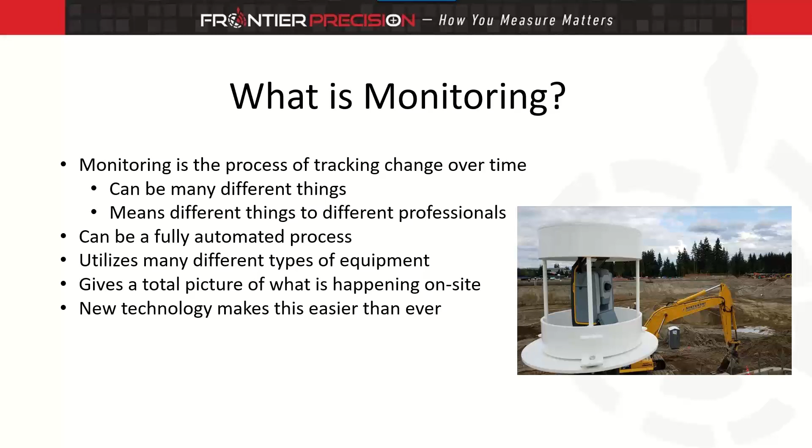These new technologies we're using today make this easier than ever, and make it very approachable for anybody else that wants to get into this line of work.

The next question then is, why do we monitor? The most important aspect of monitoring in many cases is really the safety aspect. We're always looking at ways to improve safety out in the field, and monitoring is a very easy way to make all of our lives easier and safer.

That safety aspect could be because we're taking field crews out of dangerous areas. When we're looking at mines or open pits or busy roadways, we don't always want our crews out working in these areas. So this monitoring equipment, being fully automated, can take those field crews out of these dangerous areas.

Once monitoring is set up, it allows us to detect movement early on. As things are moving out in the field, we're able to see what's happening. And if we need corrective action put into place, this data lets us know as soon as there's movement that we need to make some type of change on the site.

Maybe that means taking people off the job site entirely because there's been too much movement. But it really reduces the risk for people on the job site, and it reduces the risk of potential failures with the structures we're monitoring as well, because we know movement is occurring as soon as it happens.

Monitoring can also reduce our job costs. This is a little confusing to some people, because when we look at setting up a fully remote system, sometimes there are more costs involved in setting up these projects at the beginning.

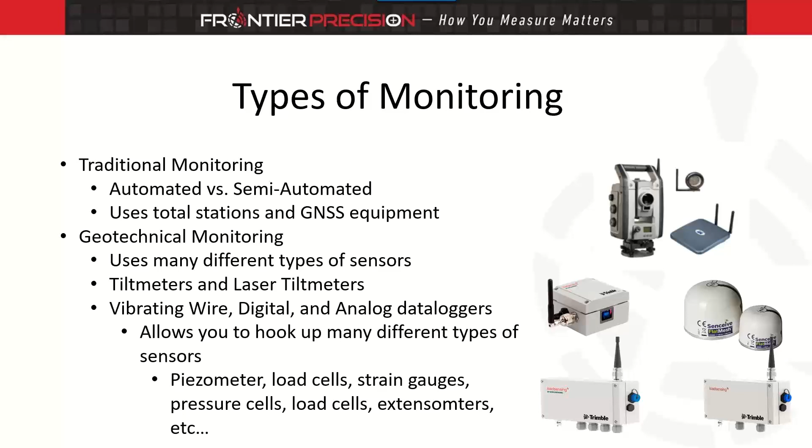A large portion of geotechnical monitoring comes down to data loggers and hooking up different types of sensors in the field. We offer data loggers in all different formats that allow you to hook up to different types of sensors, things like piezometers, load cells, strain gauges, pressure cells, extensometers. There's a very wide range of external sensors we can hook up to our geotechnical monitoring systems.

When we look at traditional monitoring, the semi-automated method is one of the easiest ways for existing surveyors to get into monitoring. This lets you use your existing equipment. You're going to need a total station, a data collector, and Trimble Business Center.

Trimble has created a monitoring app right within Trimble Access, so it's a very familiar workflow for you. That monitoring app allows you to go out in the field, remeasure the same points over and over again, and generate some rounds.

When you go out to the job site, you hit a button, tell the total station to measure all of the existing monitoring targets out there. Once those targets have been measured, we're able to create some very simple reports right in the field so we can see how much these targets have moved over time.

Once we're done in the field, we can take that data into Trimble Business Center. Trimble has also created a monitoring module right within Trimble Business Center that allows us to track our changes, process the data, and gives us more reporting options as to what we need to see and present to our end customer.

The nice part about these is they're not a permanent install. You're just using your existing equipment, driving out to the site, and measuring targets over a certain amount of time. This does require a little more time overall than automated monitoring, but it's a very low cost entry point for you.

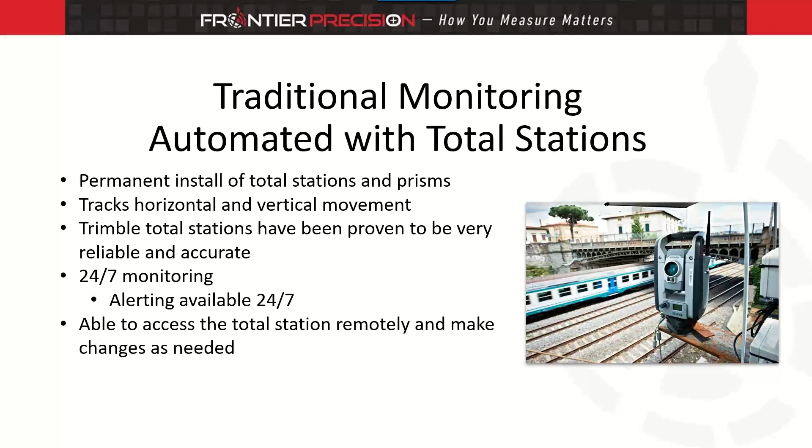The cool part about these systems is because it is a fully remote system, we are able to access that remotely and measure new targets if we needed to. We can look at the camera of the total station, view the site if we need to, and then any changes that need to be made to the system, we're able to do remotely from our office. So this is a completely remote, hands-off system once it is installed and in place.

For these projects, you are going to need a Trimble total station. This can be an existing total station you have, or we can look at purchasing a new total station. When we're looking at total stations for monitoring jobs, we can look at actually reducing cost a little bit on that upfront total station cost, because we don't always need all the features that a robotic total station is going to need for your regular survey work.

These, again, are typically installed on a dedicated pillar. It could be a poured concrete pillar. It could be a built pillar that you leave in place. And these are typically left outside. These are sealed against the elements, and so it's not going to damage the total station to be left outside. But we do also have options to put it inside of a housing if you're a little bit worried about snow or something piling up on top of these things.

Just like our GNSS systems, these can be powered either by direct 110 power or a solar power system. And then these systems do require a different data modem than what our GNSS systems do. And we have a dedicated piece of equipment called the Settop M1. This unit is actually what's going to be your field data collector and your data modem. So this is what tells the total station to measure points, and it also is what sends data from the field to our server so we can track these changes.

With that, then you do need to have either a SIM card available to put in there or have an Ethernet option available, so we can get data moving back and forth either way. You're also going to need that same software that we need for the GNSS project called T4D. Again, it's hosted on a server. That's what processes our data and prepares our reports.

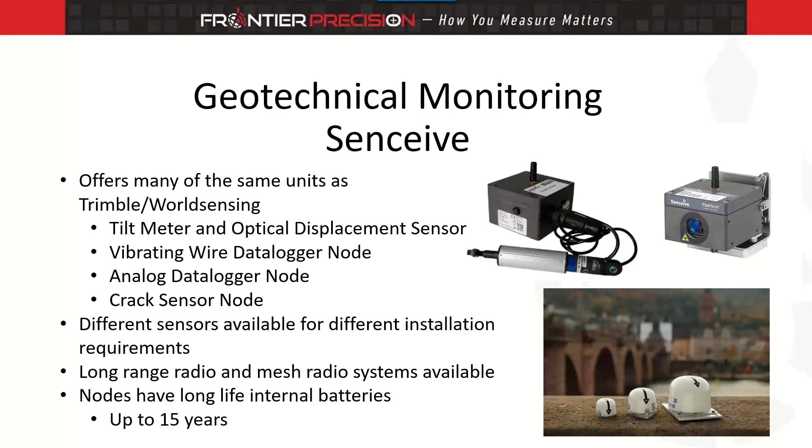We have little ones that can be put in place and you'll barely even know that they're there. Senceive does offer two different types of radios as well. So depending on the project requirements, we may be able to use a different radio that may fit that system a little bit better. And just like the Worldsensing units, these do have long life internal batteries. In this case, they can last up to 15 years left in place. So this allows us to do long-term monitoring with very little user input.

So if we're worried about, say, a wall leaning somewhere or a structure settling, this laser then is able to measure straight out from the sensor and give us that distance measurement over time. And it's very accurate distance measurements. It's repeatable down to the 0.15 millimeter range. So it's much more accurate than we'd typically be able to measure something with a total station and a man and a rod. They're very easy to configure. These are all weatherproof boxes, so we don't have to worry about these being installed outside. There are user replaceable batteries in these, and they have that long range configuration.

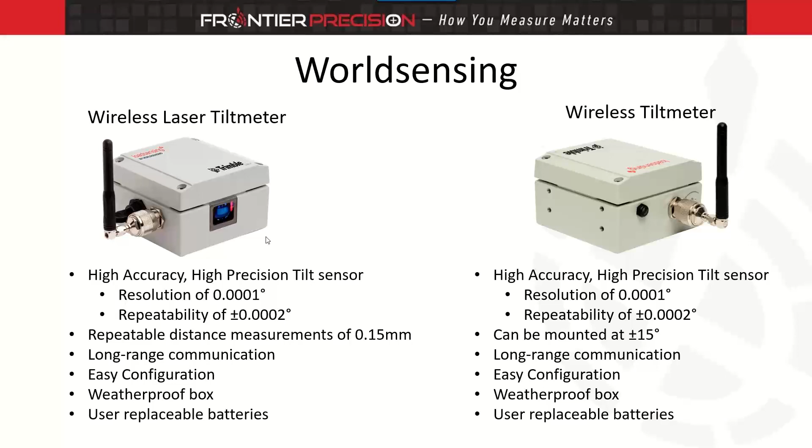And depending on how we are going to install these, we have an option to purchase these with an external antenna or an internal antenna. The external antenna is going to give us a little bit better range, but you're going to see the antenna sticking out, and there's always a possibility of that getting caught on something. So the internal antenna option does allow us to house everything inside of it, be a little bit more durable and a little less likely to be messed with.

Worldsensing is always focused on their data logger range, and they've got a very wide range of sensors able to connect to their data loggers. These data loggers are going to help us automate all of our data collection in the field. And because of the wide range of data loggers available, it allows us to hook up to almost any type of sensor that we have out in the field currently. So we have our digital system, which is kind of one of the more popular new forms of data coming into these data loggers. We also have an analog system that measures electrical input and output. And we have a vibrating wire, which is kind of one of our more traditional forms of data acquisition.

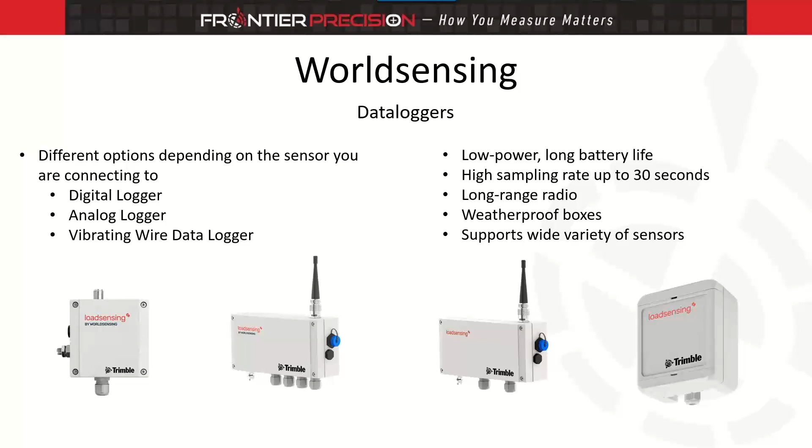These are low power units. They have a long battery life. They're all powered by that internal battery, just like the other sensors we were looking at. And these offer a very high sampling rate, letting us collect data up to every 30 seconds, giving us the option then to really accurately track long-term data on our project sites. These use the same long-range radio as those tilt meters do. It's all inside of this weatherproof box, and again, it does support a very wide variety of sensors out on the market.

From Senceive, again, we mentioned that they actually have two different types of radios that you can use depending on what your project is looking like. And so the first type of radio that's available from Senceive is called the FlatMesh radio system. This is what we call a mesh network. And so all of the nodes that are collecting data all communicate to each other, and then they all communicate to a data logger. This allows us to do what we call intelligent monitoring.

So if movement is detected, that can trigger the other sensors out on site to measure more frequently and give us more data input depending on what type of movement we're seeing and what type of change we're seeing. This FlatMesh system is typically used when there's a lot more sensors being deployed in a very tight area. Most people report data about every 10 minutes with these systems. You can increase that a little bit if you need to. So again, it gives us a lot of data over the time period that we're monitoring.

And these are fully remotely configurable. So once they're put in place, you can check these things from your office and make any changes needed from your office. Because this is a mesh network, the range between these nodes is not quite as long as some of our long-range systems, but it does still give us about 300 meters of range between each node. And then each of these nodes then act as a repeater. So, it might only be 300 meters between nodes that's available, but from the gateway that collects all our data, you can really look at extending that range out further and further just by installing more nodes out on site and collecting more data.

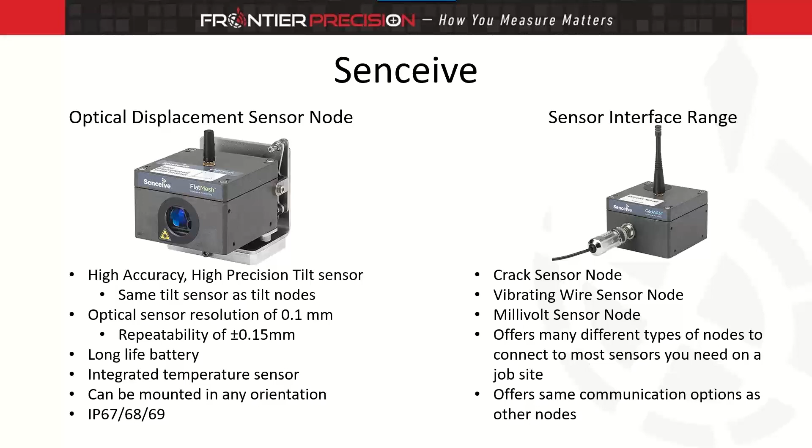Senceive also has a very cool option here called the FlexiMeasure, and this is their version of an in-place inclinometer, and it comes in various sizes. You can see that there's 4 different sizes available up here of the FlexiMeasure, and it's essentially the tilt sensors mounted inside of these flexible tubes that we can then install on a structure to track all kinds of different change. They're very lightweight. They're made of carbon fiber, so they're very easy to install.

You can install them in any orientation depending on what type of data change you want to track. It's a very low power consumption, so we don't have to worry about having external power to get these things going. And they're very flexible, so when we mount these in place, you can mount them like in this picture. It's mounted around a tunnel, and this gives us a total idea of tunnel deformation. And they're waterproof up to 200 meters, so these can actually be installed in boreholes as well, like if you were tracking changes from in-place inclinometers that way.

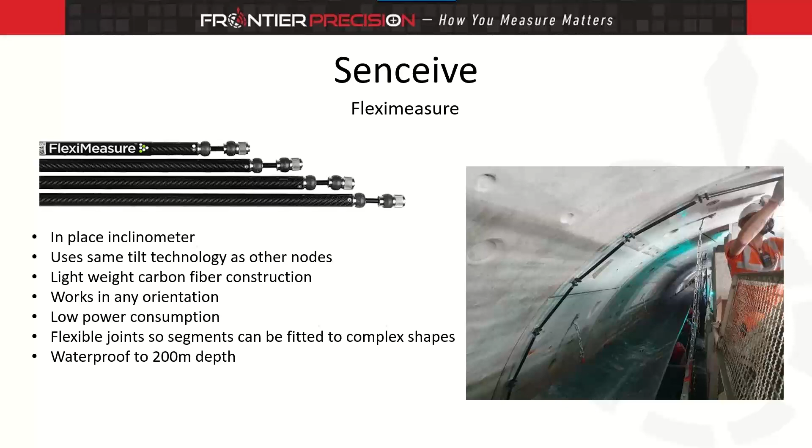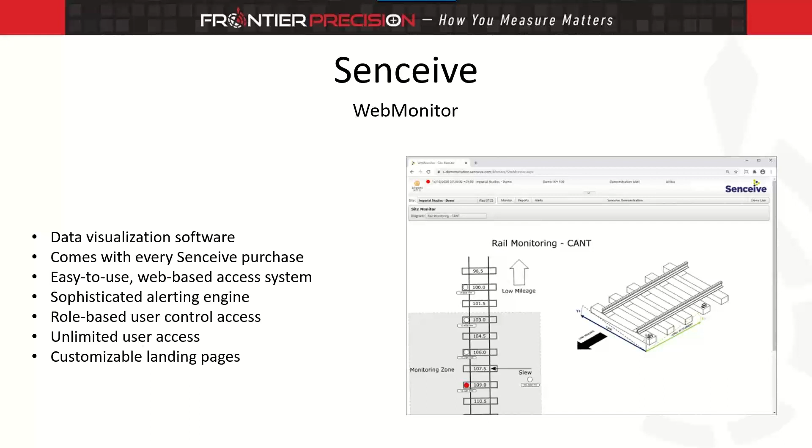Senceive does offer their own software to track these changes. Their software is called WebMonitor, and it works very similar to how Trimble software works, where it tracks all of our data, it tracks changes, and it allows us to alert ourselves if there is any changes with our data. It gives you very easy to use graphs and charts to read. It's very easy for you to set up different alerts and different tolerances for each sensor if you need to, and you can have as many users use this as you want.

That data from Senceive can all be sent to Trimble software as well, called T4D. And T4D is a software that really brings everything together. So every single sensor that we have looked at and talked about today can all be integrated into one software called T4D. This is what really makes our monitoring data powerful, because it allows us to automate our data collection, automate our processing, and then put it all in one place for us to view. It really lets you see all of your job in one place.

From that data, then we're able to create multiple reports within T4D. Those reports can be automatically sent to certain users or certain project owners, and we can customize what is included in those reports. Very similar to our alerts, we can customize those alerts that are being sent out to users as well. They can be sent to different users based on different tolerances. So you may have somebody on your job site that needs to know as soon as any movement is detected. You may have somebody off the job site that only needs to know when movement has hit a critical level. And so we can set that all up within our system. Those alerts then can be sent out over email or text messages.

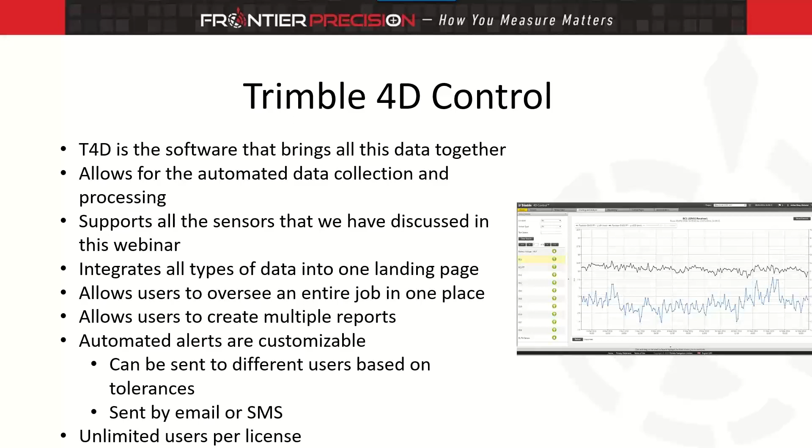And the nice part about the software too is there's unlimited users per license. So you can add as many people to this T4D license as you want, and they can all have their own level of access. So everybody can log in. Everybody might not be able to create new reports, but this is all configurable by the end user. You're able to decide what level of access you want all of these users to have.

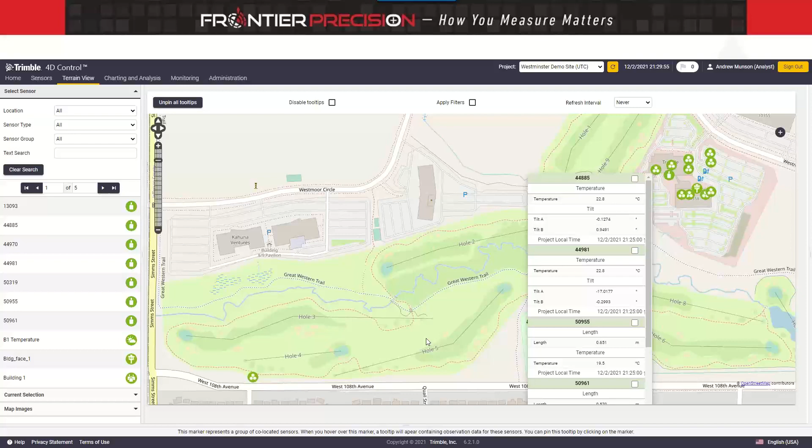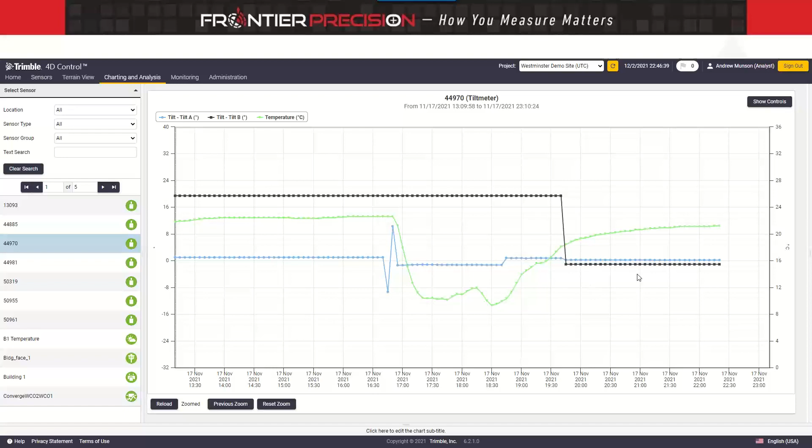From those sensors, then we're able to create charts that track our data and show us change over time. All of our axes are configurable, so you can choose how long of a period you want to look at. You can choose how close you want to be zoomed into this data to really track minute changes. And you can create charts that track all of your sensors as well.

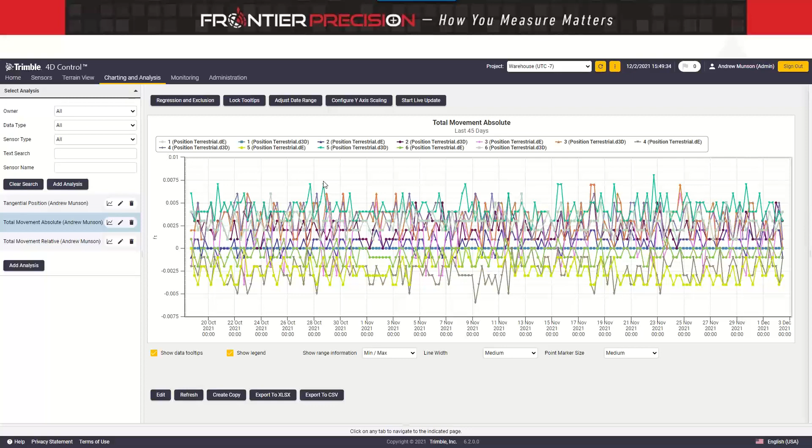So this chart right here is tracking about 6 sensors overall and displaying different types of data all in one chart. Each of these types of data can then be turned on or off in the chart, so you can really look at individual pieces if you would like to.

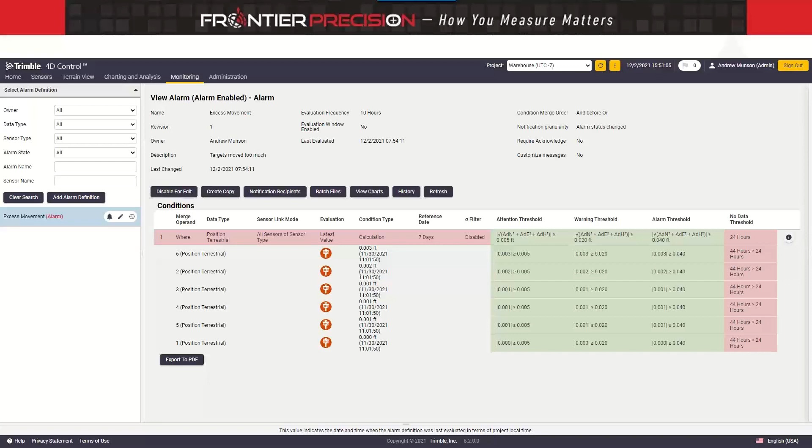So that's the other nice part about these systems: even though it's fully remote, we have an idea of what's happening, whether it's movement that's been detected or a lack of data that's being collected. This system is going to let us know everything that happens. When there is an alert that's sent out, this is a picture of the email that you will get letting you know that something is happening on your job site.

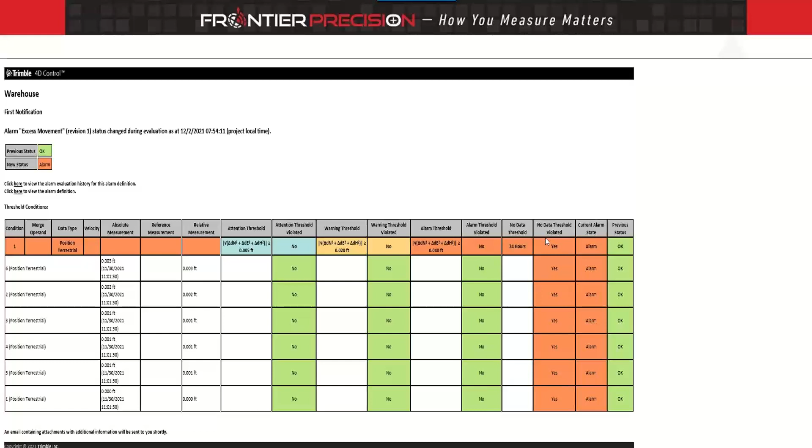And so again, if we look at this, it's telling us that we have not gotten data here for over 24 hours. And so that's why we're getting these alerts sent to our email here. With each email, then you also get another one that allows you to click on each alarm and alert that's come up and look at a little bit more detailed chart of what has happened as well. So all of this data is being sent directly to you as the end user and allowing you to track what is happening, even though you aren't on that job site.

A lot of the power here with monitoring now is that we're able to connect all these third-party sensors, and it's something that we've never been able to do up until very recently. And so with that, there are a lot of different types of sensors that we're able to connect up, and this is just a little snippet of what we're able to use out in the field.

You can use extensometers that track crack changes. There's settlement cells, crack meters, and piezometers that track all of our water levels and pressures and temperatures. So there's a very wide range of what is able to be connected out on site.

And the nice part about all of the data loggers that we offer from either brand is that it doesn't really matter where they come from. They all speak a very basic language when it comes to sending that information out. And so we can connect things like a load cell from whatever company we want to our data logger. Our data logger is just going to read that basic information coming out of it and then send that data to T4D so we can actually look at what's happening out on site.

Because there's so many of these available, we don't specifically support any one brand of third-party sensors, but we are in contact with a lot of companies that do sell these types of sensors. And so we can help you find these sensors if you need to, or we can help you integrate the existing sensors that you already have into T4D.

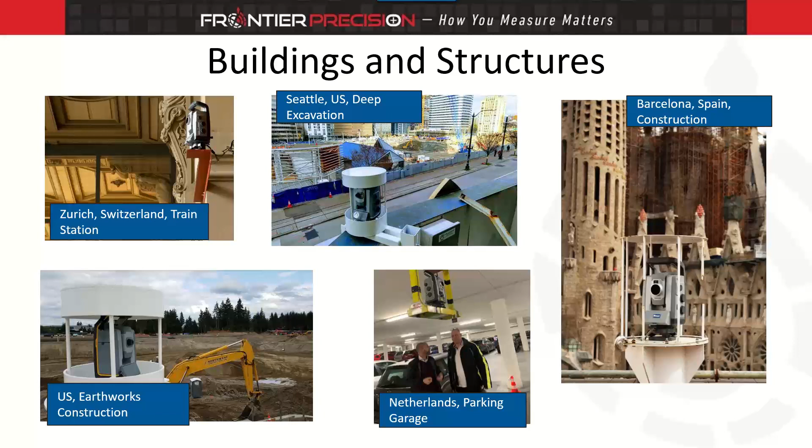It can be installed in all different situations. We've got some installed indoors, so we don't have to worry about covering it too much. They can also be installed outdoors where we've got custom mounts built in some of these photos, and we're able to help provide some of these mounting options. There's a whole range of accessories that we can provide with our total stations to help you install this equipment out in the field.

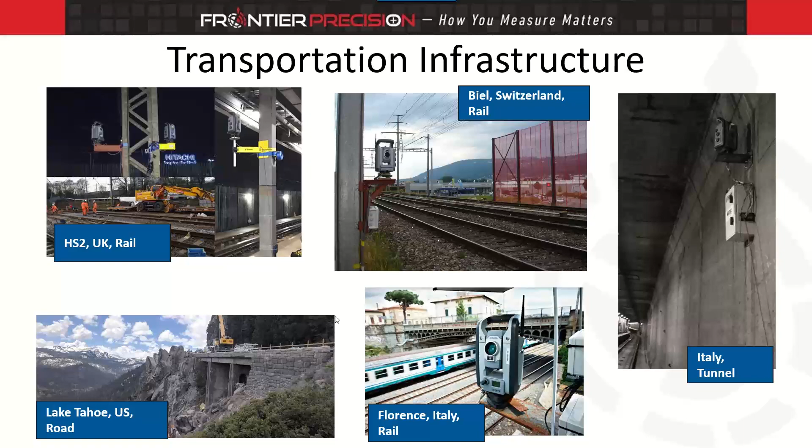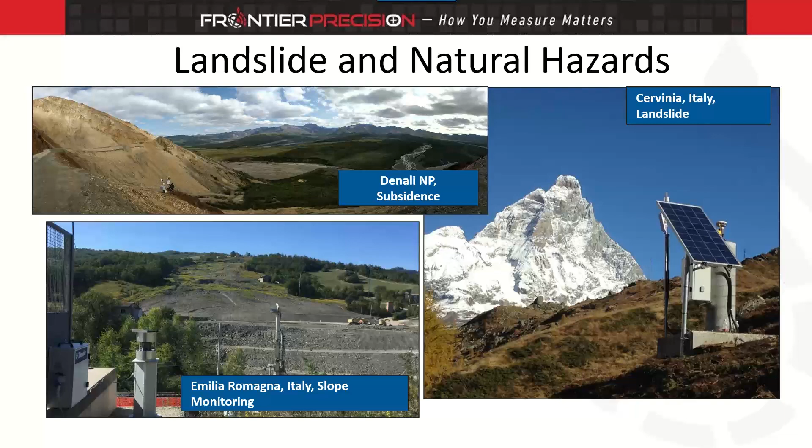We can also install either GNSS equipment or total stations in place to detect things like landslides and natural hazards. These total stations will detect any type of soil movement or land movement very early on, so we can warn people on the downside of that landslide area or potentially get some remediation in place. That's a very common use case for total stations and GNSS equipment here as well.

We've looked at total stations and GNSS systems being installed, but there are times when it's actually cheaper for us to install tilt meters on site instead of total stations. These tilt meters are significantly cheaper than installing a total station, and they're very easy to put in place. So there are times when it's easier for us to install tilt meters out on site.

Senceive's line has quite a few examples of these tilt sensors being installed in place for landslide detection. Each of these sensors records angular change and sends data back to our gateway, which is recording, sending, and tracking all of our data changes out in the field.

If everything is going well, these will just continue to work and measure, hopefully not detecting any type of slide. If slides do occur, the sensors will stay in place and track all movement just like before. But as one of these nodes starts to tilt, it can trigger the other nodes to start measuring more. This system is also connected to a camera, so as one node tilts, it will tell that camera to take a picture.

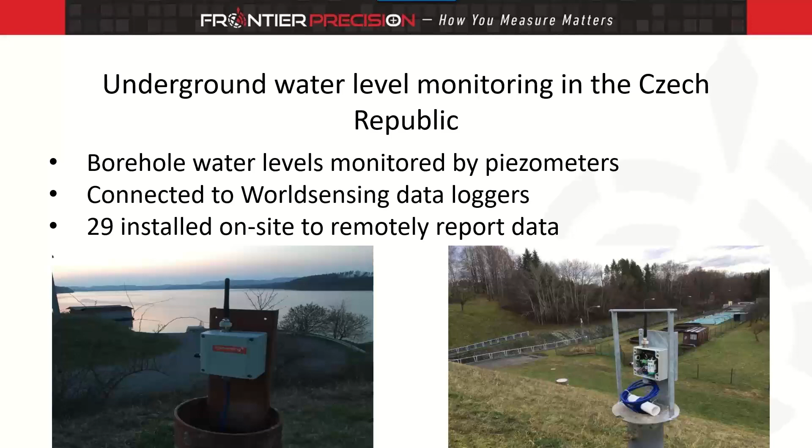Water level monitoring is probably one of the more popular geotechnical forms of monitoring available. It's another very easy one for our customers to move into, because once it's installed and left in place, it just continues to do its job and lets you collect and monitor that data as it comes in.

Rail monitoring has been a very big one for Senceive over the years, specifically measuring track bed and how that track is changing. It measures all kinds of angular tilt and change on the track. The sensors are installed right on the ties, sometimes on the sides of the rail, sometimes right down the center, giving us an idea of what's happening with our track bed throughout the day.

In this project there were actually 300 tilt sensors installed in place. They were installed on the track, but also on buildings near the track. So as construction was going on, we were able to track whether or not that was affecting the rail, and whether it was affecting the buildings near the construction.

With a project like this, 300 sensors is a lot of install, but the sensors are so easy to install. They're already turned on, already powered, and they already communicate natively to the gateway you install on site. You just glue these in place and move on.

You're looking at sometimes up to 5 minutes to install each of these tilt sensors, but when you've got 300 of them, that gets to be a pretty big project. That means big dollars for you to sell as a service to your customer.

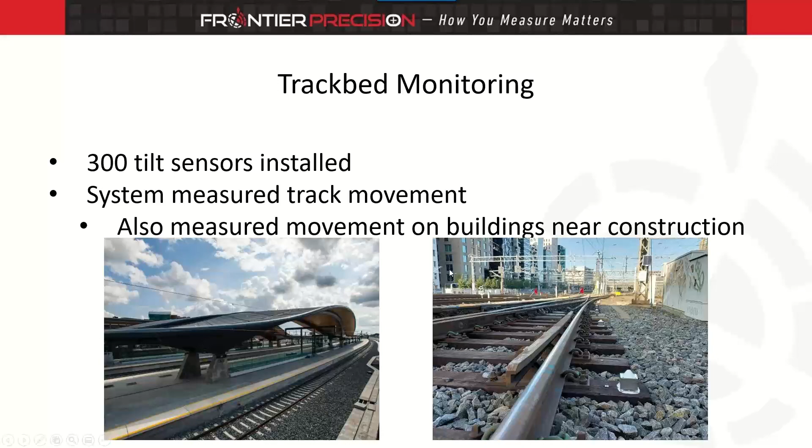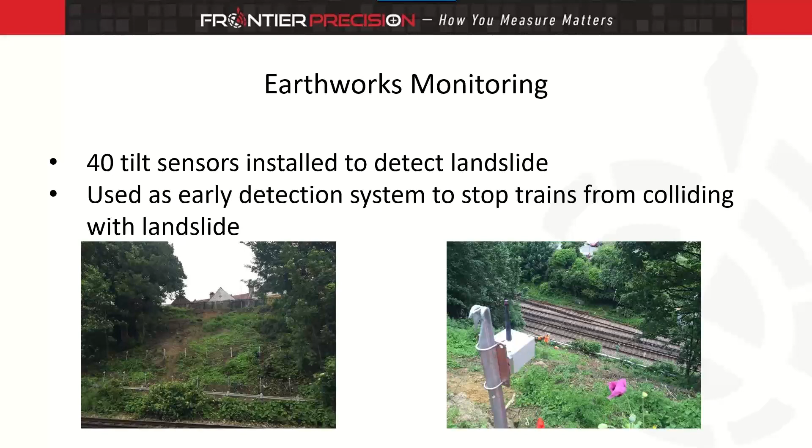We're able to see that topsoil movement, and if there's been too much topsoil movement, that's a sign for us to stop trains from going down the track and keep them from colliding with this landslide. So it's very easy install, with very reliable data that turns out to be very important as well.

Tunnel deformation is getting to be a little bit more common for monitoring as well, and this can be done either manually or automatically. It can be done with traditional methods like a total station, or with our geotechnical tilt sensors. Tunnel deformation monitoring gives us a total picture of what's happening inside a tunnel, either during construction or during the lifetime of the tunnel, to make sure it is structurally sound.

For this project, there were over 200 sensors installed throughout a tunnel, a combination of tilt meters and optical displacement sensors. The tilt meters can be installed anywhere, on the track or on the walls.

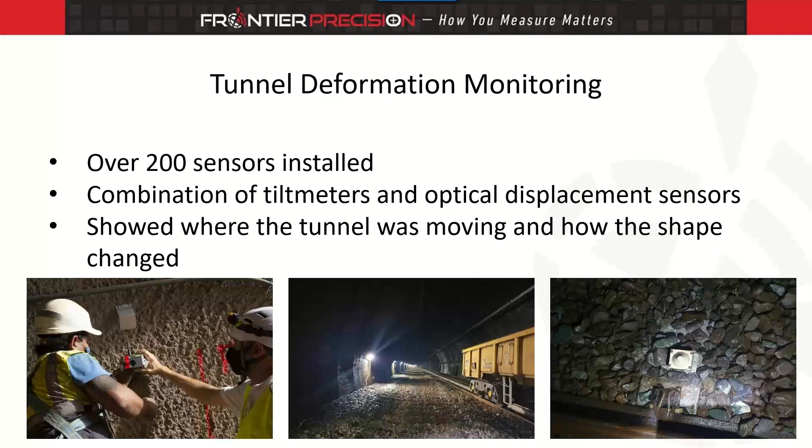Those optical displacement sensors with that little EDM are typically installed in a ring at specific stations throughout the tunnel. As the tunnel changes and moves, we're able to detect that angular tilt, and with that little EDM we're able to detect distance change as well. That distance change really gives us a total picture of how the shape of that tunnel is changing throughout our construction project.

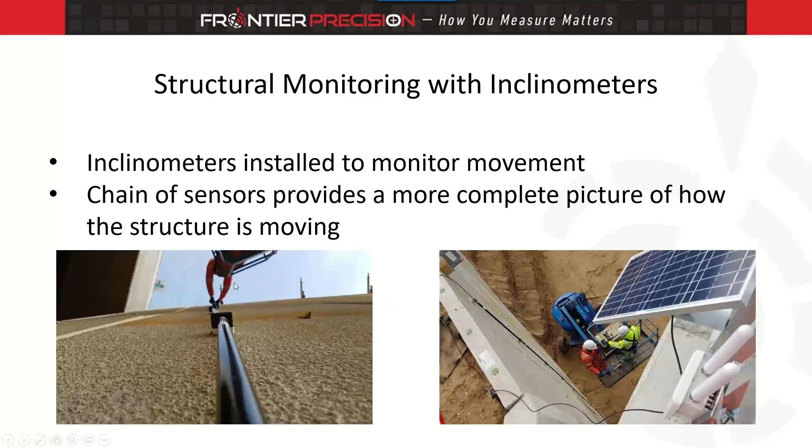These inclinometers can be installed on structures or in boreholes, but they really give us a much more complete picture of how the structure is moving and changing. Because these sensors are all connected, everything moves at the same time, so we know it's a continuous form of movement. These can be installed in any orientation, but in this case they were installed vertically to track horizontal movement on the building.

But we always need to look at what type of accuracy is required. Do we need a high-end total station, or can we get away with a lower-end total station? Do we need post-processed GNSS data or real-time data?

Access to the site is always something important to know, because a lot of these we may only be able to get out there once or twice, and then you need an escort every time. So these remote systems allow us to continually measure without needing access to the site. And there's always different installation costs for each system, so that's something we want to look at as well.

We need to look at the total area that we need to cover when it comes to monitoring. Sometimes a total station can't see everything, so that's when we supplement our total station systems with our tilt sensors and put together an entire monitoring system. And then we need to know if real-time answers are required. If so, that really means an automated monitoring system is going to be the way to go when providing monitoring services.

We always need to look at how many things need to be observed or measured, whether that's water levels or pressures or just total amounts of prisms out on site. We need to know how often we need to measure these, so setting up a schedule to continually measure.

We need to know what our power requirements are out on site. Do we have access to power? Do we need to bring our own power? And then same with communications. Most of these systems rely on a cellular system to send data back and forth, so we need to know what type of cell coverage we have. And if we don't have cell coverage, do we need to look at satellite internet options, or somehow getting a hard line of internet out there through Ethernet?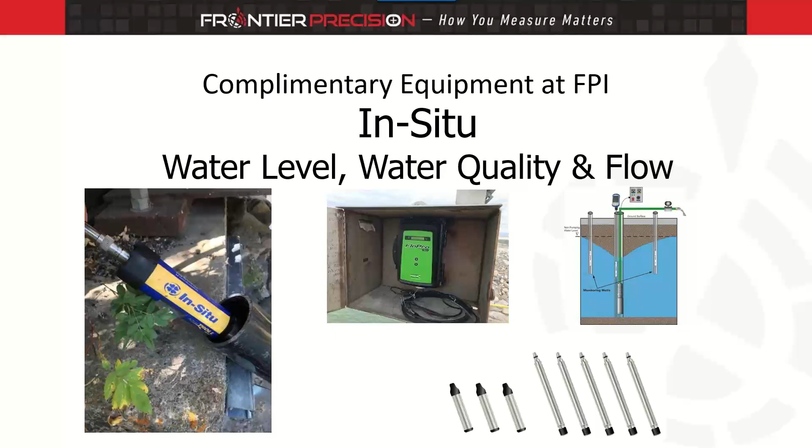Frontier Precision does also carry In-Situ equipment, and we have a specific salesman here at Frontier that covers In-Situ. In-Situ includes some of our water level sensors, water quality sensors, and flow meters. A lot of this is able to integrate directly with the monitoring equipment that I sell as well. So at Frontier, we're really coming to you as a total team approach, trying to provide your one-stop shop for all your monitoring and inspection needs.

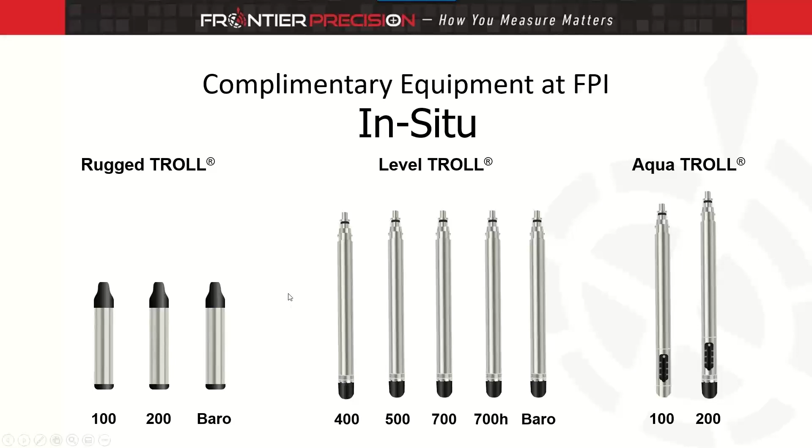There is a full line of sensors that is supported, whether that be just water level or water quality. But again, we have a salesman here at Frontier that covers all this equipment. His name is Steve, and he'd be happy to help you out with any type of water monitoring questions.

So what are our next steps then?

Because monitoring is a little bit more difficult to get into, we want to be able to provide a service and help you guys get into this type of work. So even if we're just doing very basic exploratory type discussions, just give me a call. That's exactly what I'm here to do, is to help you guys look at what we need to install out on site and how this equipment works together. So just bring it all to me. We'll sit down together. We can do it online, just do a little web meeting and look at your job site, what's needed on site, and how we can provide data for you.